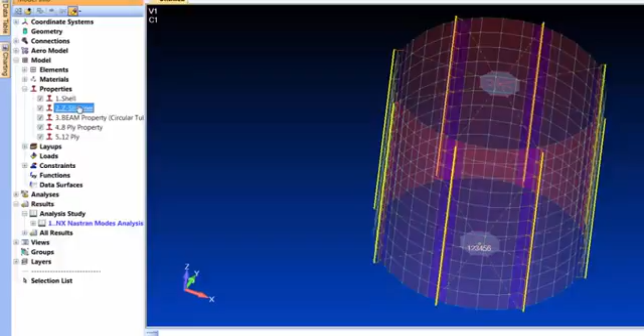So here's that property. There's my beam elements. We got a couple aluminum plates there in the middle. We got some tubes in the top here, and then we've got an 8-ply property in a thinner section and a 12-ply property out here in a thicker section. So that's the model we got. So let's do some post-processing.

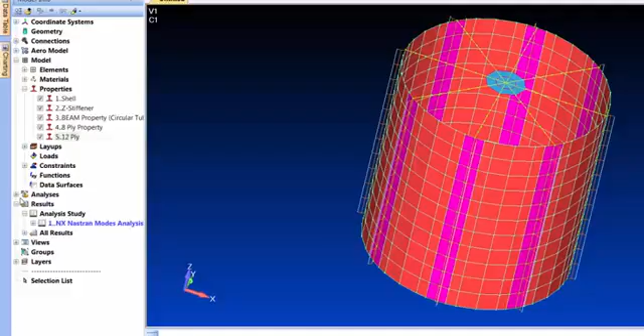For modes, we could obviously just animate the mode shapes, but let's move on to do some actual structural analysis. What I'm going to do now is in my analysis, let's set up the load sets first. So I'm going to create a new load set and call this plus X acceleration and say OK. And then there's a new empty load set. What I want to do is throw a body load in there. So I'll just say edit the body loads.

And I'm going to put 1G on, and I'm using US units on my model here, in the X direction. So that's 1G in that direction. And let's go ahead and copy this analysis set twice. So we'll go in here and edit its name. Let's do plus Y. Sorry to bore you with this stuff, but just getting some things set up here. Let's edit that body load, and we're going to make it in the Y direction.

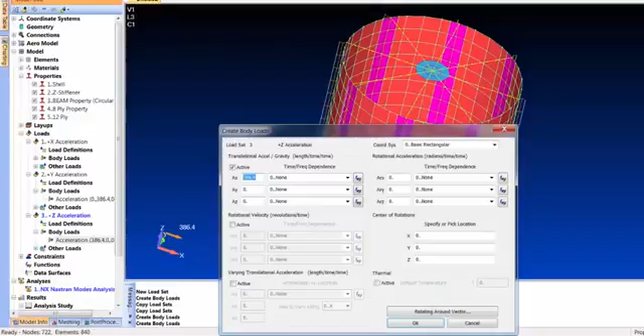And we'll do the same thing on our Z set. So just going to click it a second time here and change the title. The titles are nice just to keep things organized. But go in the body load, open it up, right click and edit. What I do is just zero that out, hit the tab twice, and paste in my 386.4. So there's my three load sets in three different directions.

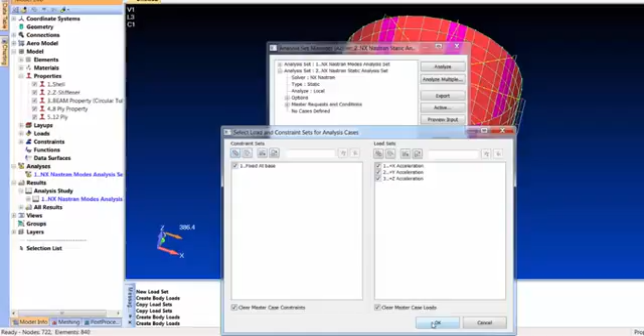So I'm going to go down to my analyses and say manage. My modal run's still in there, but I'm not going to use that. I need a static run. So I'll say new. Here under Nastran, here's all the different analysis types you can set up. But let's just do a simple static run. We have already constrained at the bottom, so we need to do a multi-set run. I'm going to say for this one constraint set, and if we had more of these, it would create all the combinations, but there's just these three. So let's create those sets.

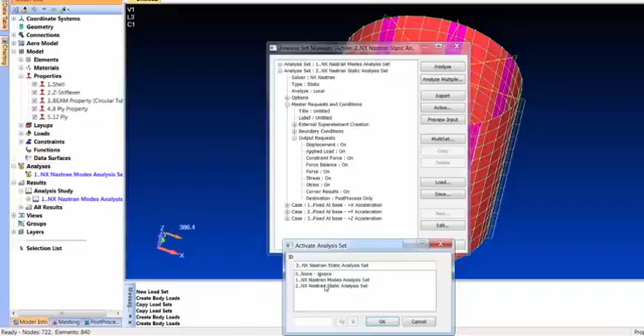Then under the output, in case later on we want to do some free body stuff, I'm going to turn on the force balance. And since this is composites, fiber strain is important, so let's turn on strain output from Nastran. So at this point, we're ready to go. I'll make sure it was already active, so I could just hit analyze, and Nastran will go off and run on those three sets. And it looks like there it goes.

You can actually monitor the Nastran solution as it's moving along here in our little interactive window. So you see Nastran start up. You get any information messages, things like that. You get some solver feedback. This is probably going to solve pretty quick. It looks like it's already done solving the matrices and doing all the back-end processing to calculate displacement, stresses, laminate output data.

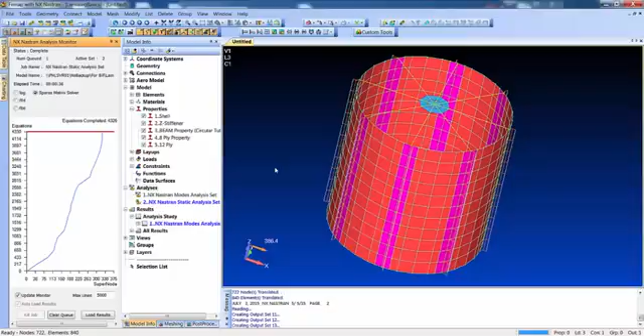So it's done. FEMAP watches it, sees it's done, grabs the results. I'm going to close this guy down. Now it's still looking at the results. All right. So now we got a new study. That's my statics, right here. The modes are up here in this study, but statics are down here.

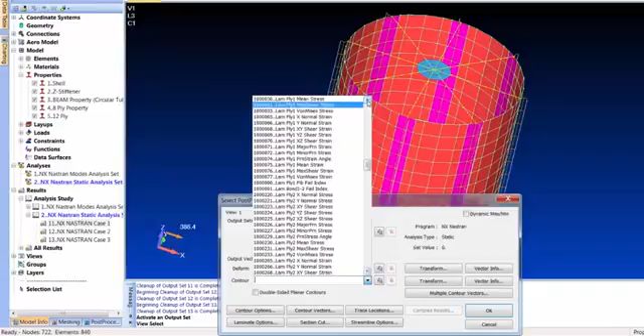So we could take a look at what's going on here, let's check the deformation, and we'll turn on a contour. Deformation of total translation makes sense. But since this is laminate, let's get down in here, and there's some ply data. There's ply 1, and there's our strain. So there's the strain in the fiber direction. This is a pretty important piece of information.

So first thing we check is, yes, it did go in the X direction, did go in the Y direction, did deform in the Z direction. So it looks like we got everything set up pretty well. Now you might wonder why I did the 1G in each direction. I'm going to show you why.

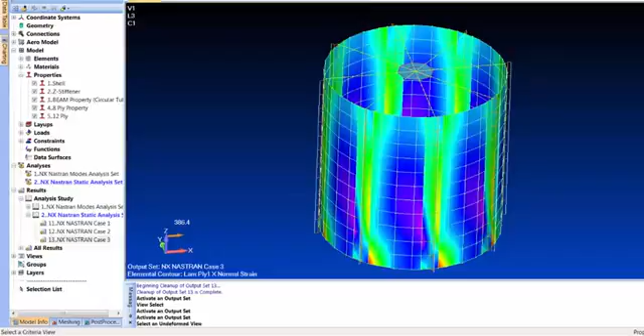We've got a neat tool in FEMAP here that we can actually calculate combinations of data or results data. So I'm going to create a new empty data surface that's a result processing. And what I want to do is this will be the data gets created on the fly. So I'm going to do linear combinations and create this stuff.

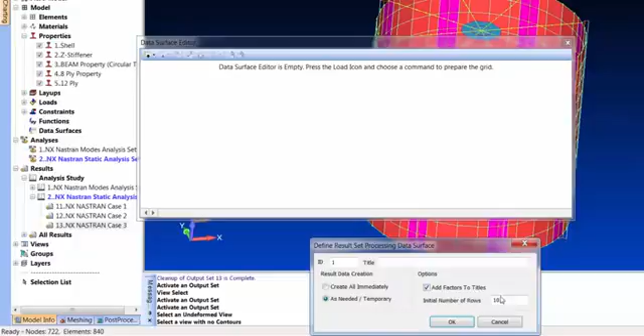So let's do 6 rows, and you'll see why I'm doing that in a second. And I want to use data from those 3 sets. So remember, that was my set 1 was my X, Y, and Z. So let's say we want to do 5G, 5 times the 1G, so that'd be 5Gs in X, and then we'll do 5Gs in Y, and we'll do 10 in Z.

Then we'll just do our combinations. So we'll do another linear combination. Let's do -5, 5, and 10. We'll do another linear combination. This is creating new virtual output sets. So we want -5, oops, problem typing there, -5, 10, and then we'll do the same thing down here.

So we're going to do linear combination, and let's just match this. And let's just say in negative Z, there's a bigger load, so we'll go -12. So same thing here. Let's just do -5, 5, -12, and then do -5, -5, -12.

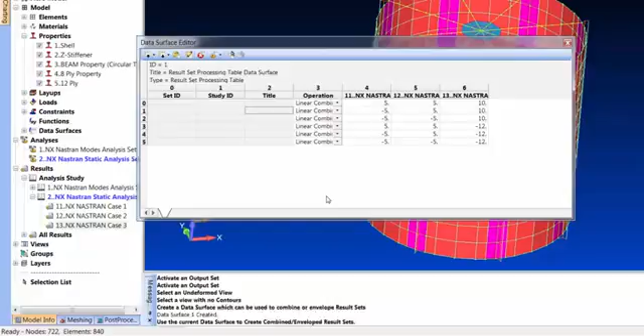So that's my combinations. Now what we can do now is we right click and say we create these result sets. So now it's actually creating these linear combinations with these factors. I can close this window down. You'll see that here's our combined load sets with their titles. So I've got all those things, and we can post process on these.

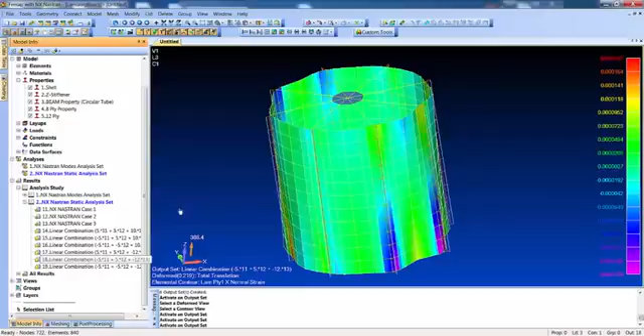So I can look at this one. What's the deformation with those factors applied? What's the ply 1 max or ply 1 fiber stress? And you can just quickly go between these. Now in the laminate world, what you probably really want to do is there's lots of plies. We probably want to do some type of summation. So let's do some max min works.

We've got a model output process, and we want to do some enveloping, and I want to see these max fiber strains. So what I'm going to do is envelope all selected vectors within the set. So within each set, it's going to go across all the fiber strains to get me the max min, and then do another one across all the sets.

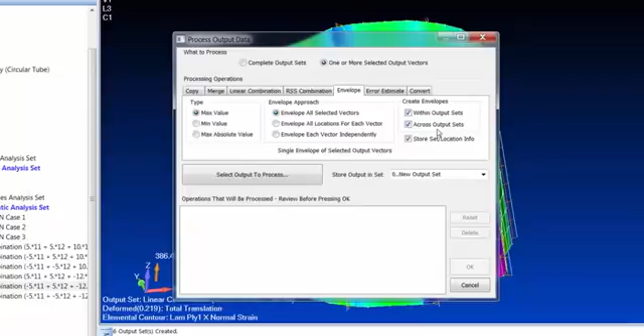And it's going to ask me what to process. So I'm going to go here and say I want to do just my linear combinations. And then what I want to do is get down here to the ply 1. I'm going to get the fiber strains going. So ply 1 X normal strain. And the nice thing you can do here is if I've picked ply 1, I can say add all layers with the same type thing.

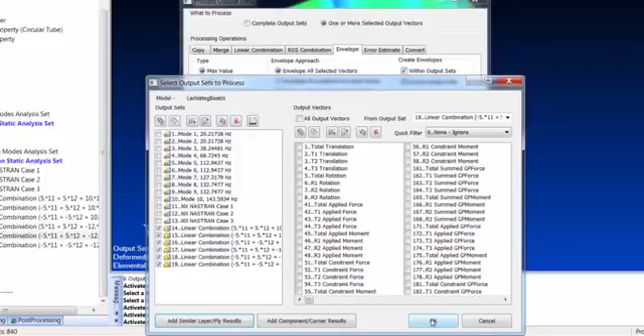So it'll go through, and FEMAP will just basically check every one of those fiber strains in the X direction. So now I say OK, and it shows me what it's going to do. It's going to create these max min searches across all that data. So what it's doing now is within each set, it's calculated a maximum fiber strain within that set.

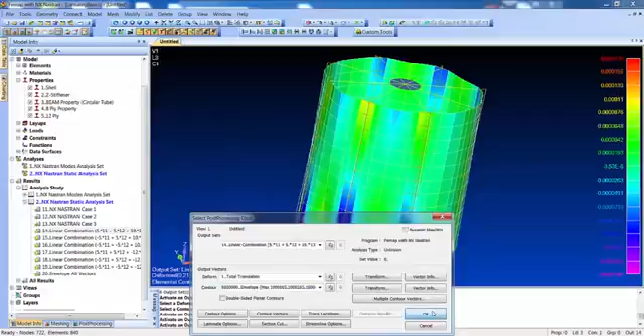So I can go down here, and here's my max fiber strain for all 12 plies. So there we can see, and it kind of makes sense right down around where it's constrained. You're getting some increases in fiber strain, but that's for that output set. There's for that one. But the real nice thing, it also did it for all of them. So within each output set, you got the max fiber strain for that set, but then you've also got the max fiber strain down here for all 6 of them.

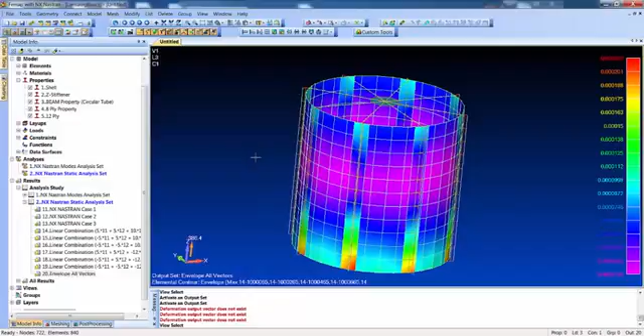So it's a great way to go through and look at a lot of laminate data. There's a lot more you can do with post-processing reports, and export this data. You can get to it from Excel, but there's no deformation in that set. That's why you're getting that one little error message. Turn off deformation. But some fantastic post-processing options for laminates, for regular elements. FEMAP's got it all.